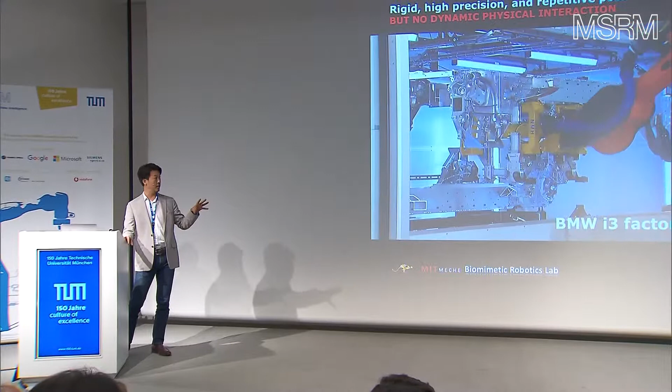This is a screen capture from the BMW i3 factory. It's a little more appropriate in Germany, not so much in Japan or US. But these are amazing robots - they're faster, more accurate, much more consistent than humans, and they don't get tired. They're super accurate, they can do all these things really well.

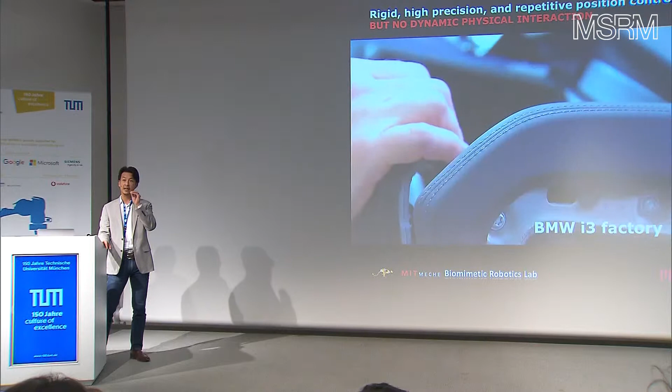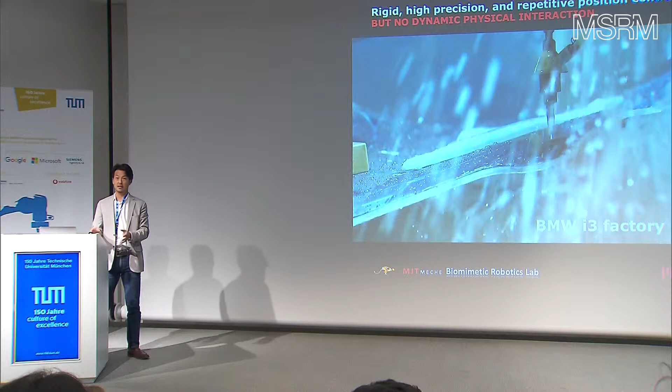But if you really look carefully, none of these robots are actually dynamically interacting with the environment. So when it comes to soft objects, even cabling, it all has to be done by humans - because none of these tasks that require dynamic physical interaction can be done by just coding a position. All these robots are just following a predetermined trajectory. So literal physical interaction, not just moving objects from one place to another, cannot be done by just writing a position.

Antonio already showed this video, but I'd like to show some clips from the DARPA Robotics Challenge, designed to tackle disaster response. There are amazing algorithms and amazing engineers working on it, but the hardware is not quite well suited for this kind of task, because many of these robots have components that came from manufacturing applications - pretty much the same technology.

But if you look at the animal world, things are quite different. The biggest difference is these are built to handle impacts. Probably none of you think about this every day - I think about it every time I walk. Every step is impact, every time I grab my cell phone from the table is impact, and we are dealing with it.

It's invisible to you because your hands are doing it automatically - you're not really aware of what your hand is doing. Think about during lunch, what your tongue is doing. You have to chop your food down, and if a big piece comes out, you push it back to the teeth. Your teeth don't have any intelligence, right? You're chomping down, and if pieces are small enough, you throw them to the back of the throat.

And if you find a small piece of paper, you bring it out with your two lips while you're talking to your friend about politics, and you have absolutely no idea what your tongue is doing. Same thing happens in your hands and everything.

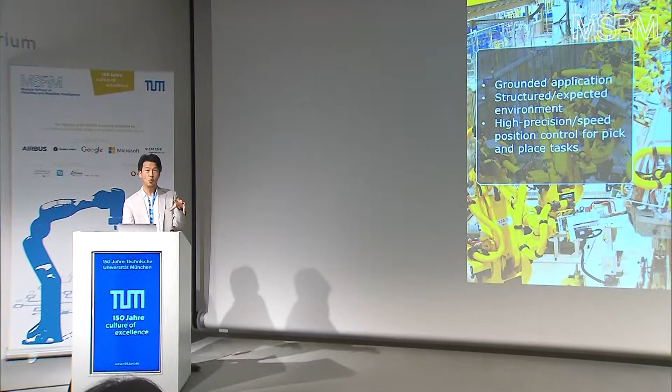So my point is we need to change our robot design paradigm from grounded applications, where everything is known and position accuracy guarantees success of the task, to mobile applications, where nothing is really like that. Your robots are not anchored to the ground - you have to control your balance rather than your position accuracy. Force control is way more important because nothing is certain.

You always have to deal with an uncertain environment. You have to deal with situations where unexpected collisions happen all the time.

So the design paradigm needs to really shift, and many other people, even in this room, have worked on this area. I just want to point out a few things.

Conventional machines are typically stiff, and with the stiff sensor, the series elastic actuator has been really popular, and there are many success examples.

In our group, we actually took the old idea and came up with a slightly different concept. We call it proprioceptive actuation. We basically minimize inertia and friction between the actuator and the end effector by reducing gear reduction and reducing all the inertias.

And then maximizing the torque density of the actuator, so we can actually get rid of a lot of system-level issues, while maximizing the force bandwidth. So I'd like to show a couple of examples.

The first one I'd like to show is the Cheetah 2, which we published in 2014, I believe. Many people say, wow, it looks like a dog running, but I want you to look at how the machine handles impact.

This is a non-trivial machine. It's about 30 to 32 kilogram robot running about 22 kilometers per hour. It's as fast as me.

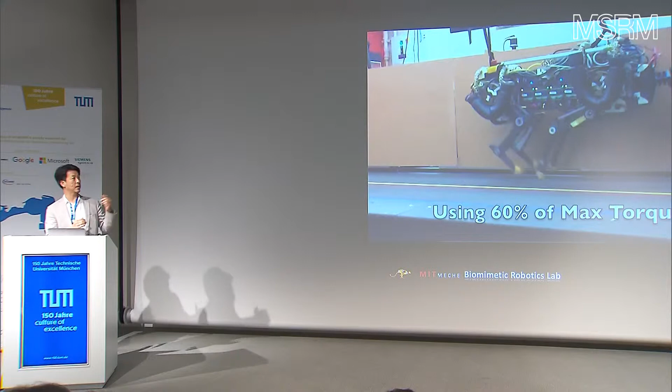Every impact at high speed generates about 50 to 80 kilogram force in each foot. I'll show you the data. The time on the ground is about 80 milliseconds.

It can turn, but it's pretty terrible actually at turning. I'm going to show you a better machine later.

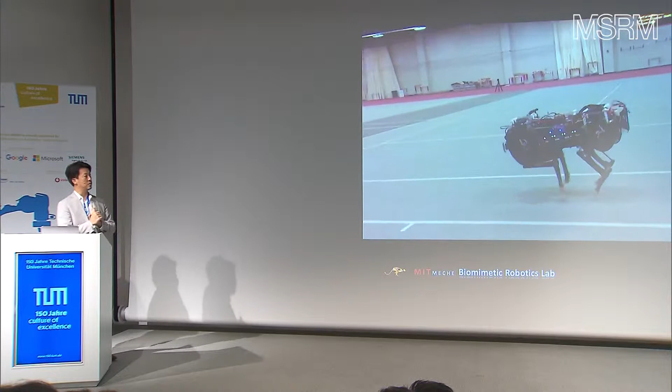This is the first time we integrated vision to react to an obstacle. The LiDAR system looks at the obstacle and measures distance and height, and then we run a real-time optimization.

At 10 hertz, we solve this problem ten times a second, and then react upon it, jump, and land. So the most important part in this video is actually landing.

We spend about 95% of the time on how to land. Jumping, recognizing the object, and solving it was a piece of cake. Landing, not falling, is actually the hardest thing.

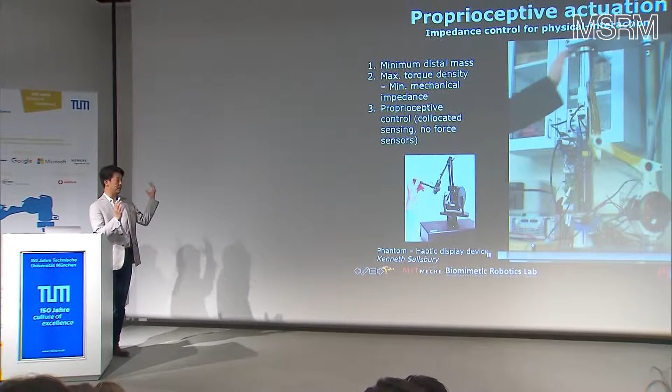This is a video from 2010. We first built the leg to see how much we could exploit the concept, so we can impose whatever impedance within the stability range.

We can make it into a pure damper. We can make it into a spring. And we can change it at the millisecond level.

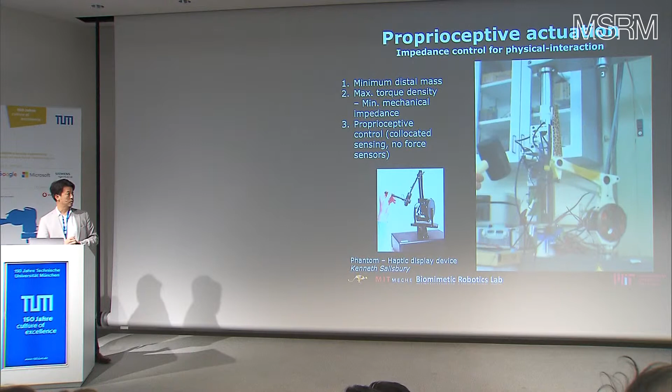It depends on the situation. This is an impedance control example, but most of the time our robots are actually under force control. So during the swing, leg swinging is all impedance control, position control with feedback linearization to make the position accuracy better.

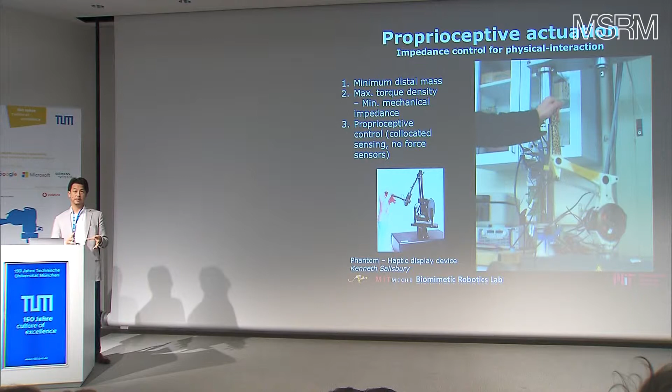But as soon as it hits the ground, we switch to the force control regime, and all the inertia is ignored as soon as it hits the ground, because the body inertia basically dominates.

This concept isn't necessarily new. Phantom has some examples, but the best example I think is from 1994. This was actually the bigger main motivation, the main idea source for our Cheetah robot.

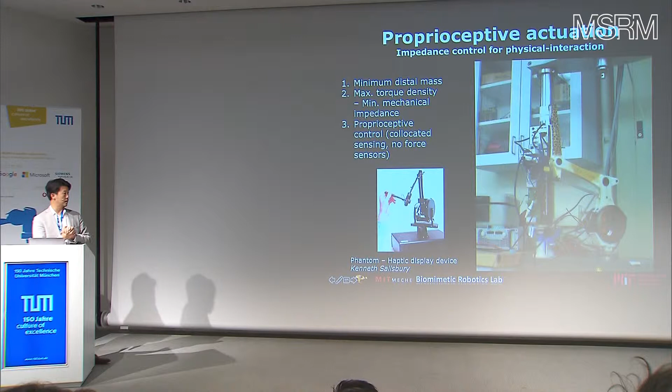The Phantom is, in my opinion, the best force display, haptic display device, and the concept is exactly the same. Ken Salisbury never actually published a paper about this.

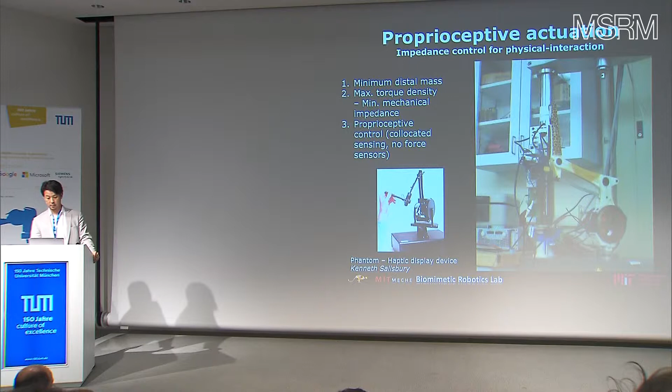So we made a bigger version, focused on force density, because haptic devices tend to be very weak and can't deliver high torque. We focused on motor design and other aspects so we could use it in a real system. We call it Phantom on steroids.

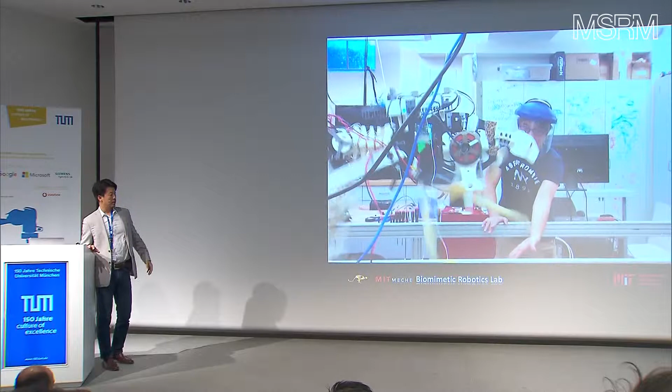There are many advantages, but one of the biggest is that you don't need to have a sensor in the foot. We basically have a piece of rubber, but our robot can still detect things without having a force sensor.

I'm going to show you many other examples later. Many people thought, oh, you're measuring current. It's actually not measuring current.

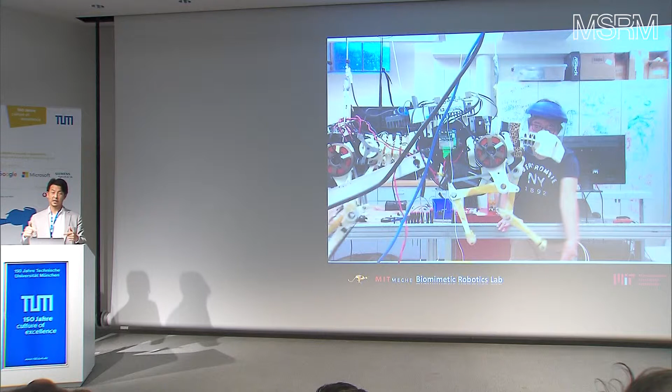We're actually commanding force. We're detecting our deflection, and the deflection dominates how much force we're recovering. There's some noise issue, but mainly we're actually controlling forces.

I don't want to go through all the math, but we realized the most important aspect of actuator design is actually inertia. So we look at the inertia distribution, and basically the best way to describe how backdrivable your system is is the inertia ratio.

So we say, don't call it backdrivability anymore. We have a better metric, which is IMF, impact mitigation factor, which basically compares your inertia matrix at the end effector with your worst case scenario.

That's a locked position, so it doesn't work with a non-floating base machine, but you can always make the machine float and then apply this, and calculate your IMF. That will be the best representation of your machine's capability of handling impact.

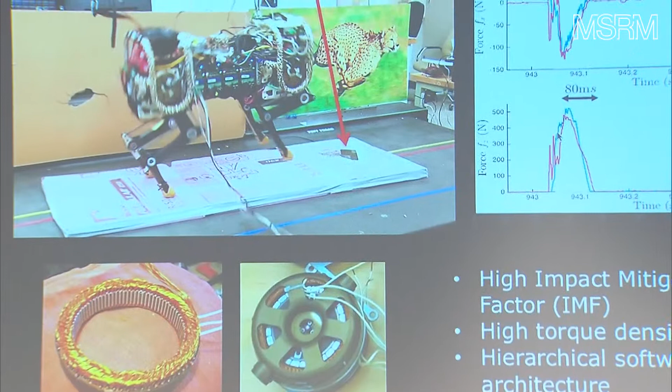There's no feedback, you're just comparing the commanded and measured, and there's pretty bad accuracies, like 15, 10%. But I want you to look at the time axis. This is about 80 milliseconds. 80 milliseconds is most manipulator people's accident, it's hitting like this. Your blinking eyes takes about 400 milliseconds.

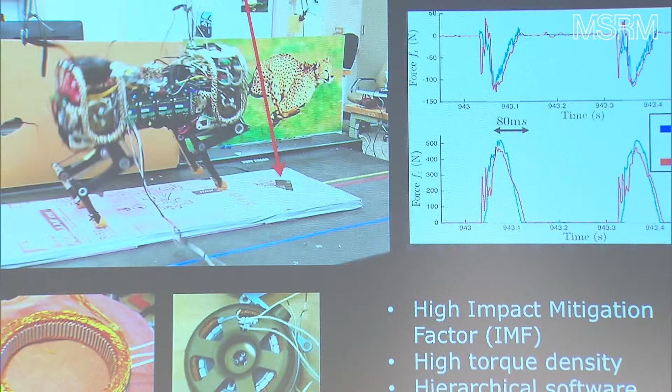About a fifth of the time, we should be able to control ground reaction forces up to 50 to 100 kilogram. That's the level of force bandwidth we need to have to make robots run and balance.

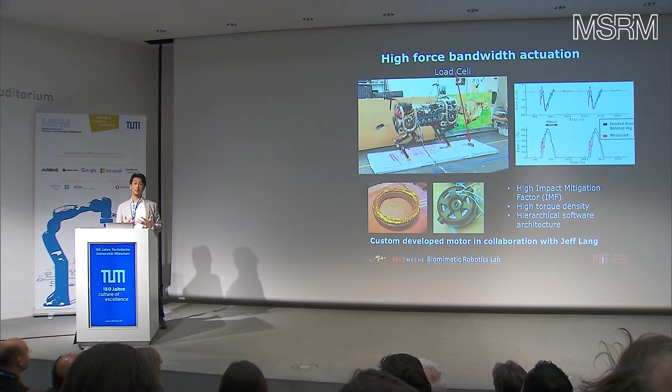And why do you need to be that fast? That's all the time you have. Real Cheetah is running at 60, 70 miles per hour. Each leg stays on the ground about 45 milliseconds. When you're running or jogging, each leg has about 150 milliseconds. When you're walking, you have 400 milliseconds, but that's still a very short period of time. If you cannot control that very short period of time, you will not be able to balance. That's basically the nature of locomotion.

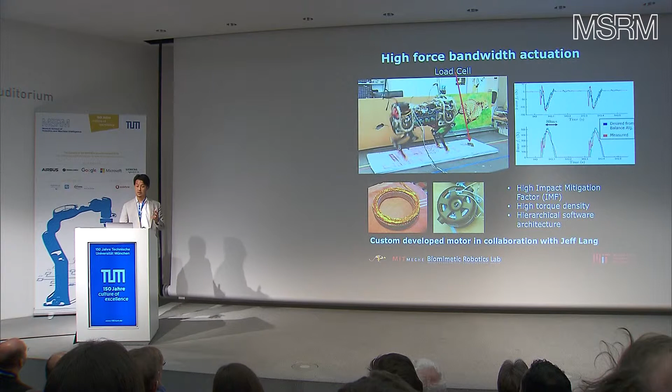And if you think about manipulation at human level speed, it's actually not that different. You have to think about force bandwidth as one of the major criteria.

I just want to point out, by the time we were building the Cheetah robot, it was very controversial - a lot of people thought it wasn't going to work. After we showed success, many people started taking our concept. Spot Mini from Boston Dynamics - not all the joints employ our concept, but the knee joint, the most important joint for handling impact, actually takes our concept and uses it. One Chinese company sort of copied the Boston Dynamics robot, but the actuation concept is exactly the same as ours. Cassie is another example. So many successful robots started employing our proprioceptive actuation as a successful use case.

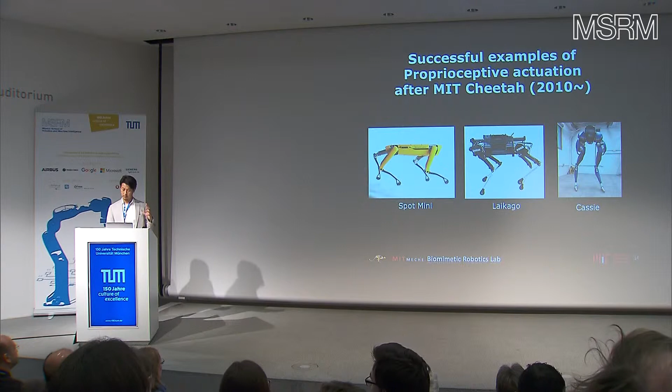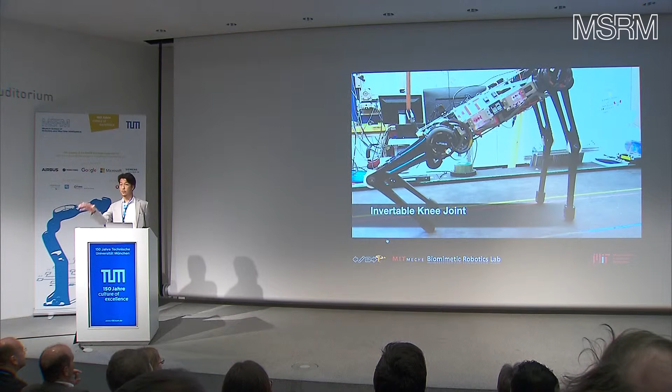I want to introduce a third version, the latest version. It's heavy, still 40 kilogram, and each joint can generate about 220 Newton meter, which is about as strong as a car engine, like a sedan. But you shouldn't be surprised - most of your knees can actually generate about 200 Newton meter, so you could attach an engine to your knee and your knee would win over the engine. Your hip can generate about 300 Newton meter.

This robot starts running on MPC, model predictive control, looking ahead about half a second into the future. We write a cost function around that state half a second in the future. So it's good for dynamic maneuvers because you need to really predict the future - the instantaneous controller is really not good for this dynamic gait.

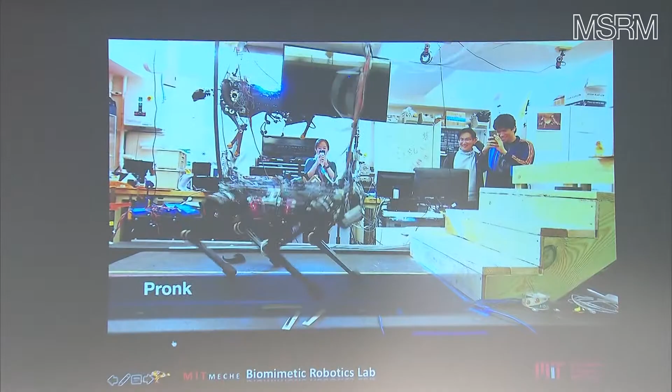And again, the machine is designed to handle impact. So those gaits are just part of the story - the machine should be able to handle those impacts all the time, because that's the nature of leg locomotion.

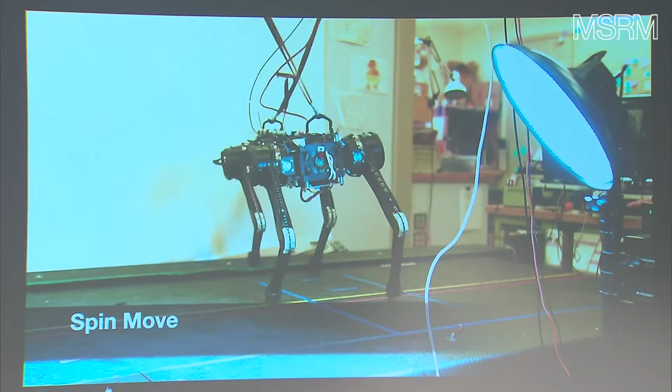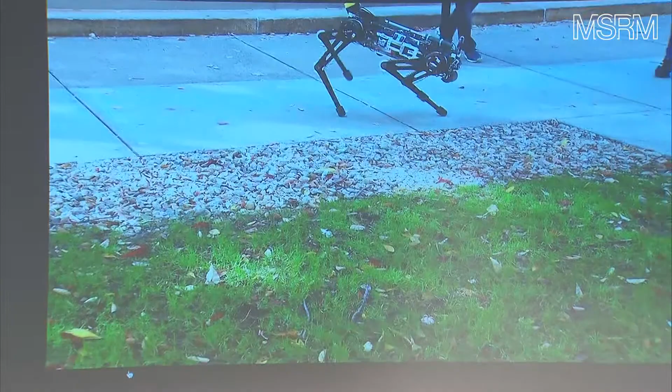The interesting thing about the leg robot is you can command the direction of motion and orientation independently. So you can command turning left 1 radian per second while going 45 degrees to the right. You can do that - each leg basically has a 3 degree of freedom force source, and ground reaction force control bandwidth is about 20 to 30 hertz, which is critical. You can command the same algorithm with 3 legs, assuming 1 leg is broken.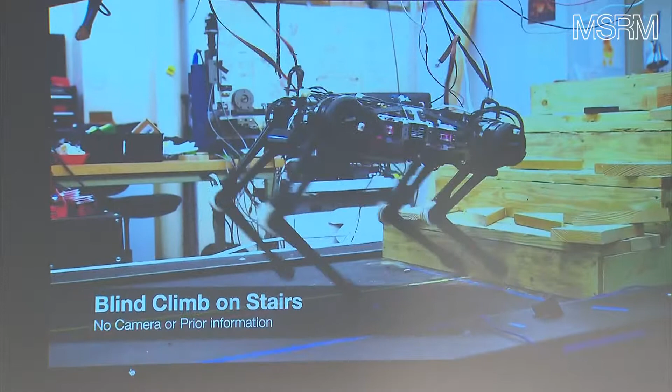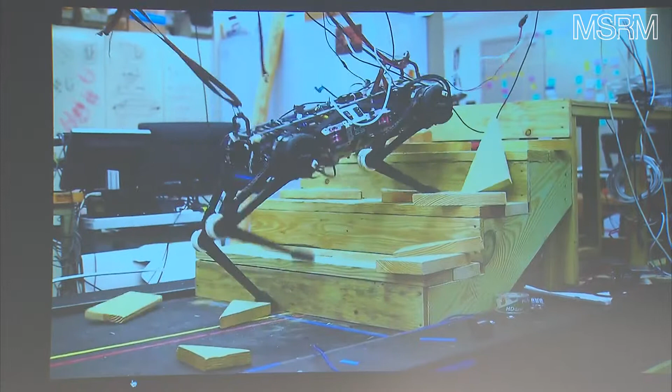And this part is interesting - you don't use any prior information of the stairs or a camera. These are all based on touch. As soon as our touch algorithm detects a contact, that becomes a ground reference, and we create our own desired position. These are all done automatically.

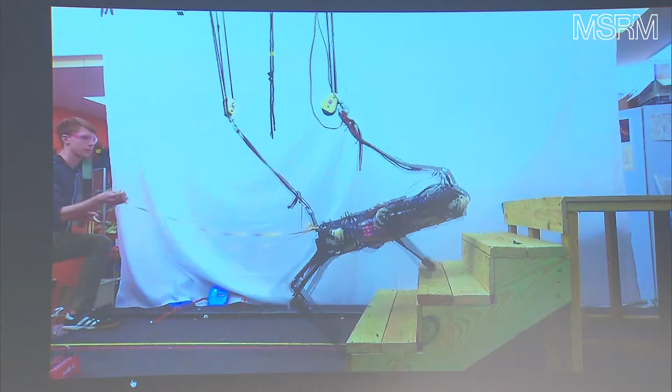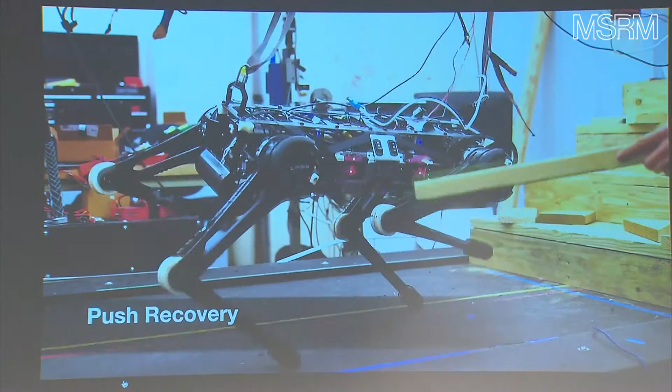Contact detection becomes a very critical part of our algorithm. If you don't know how to switch from the swing to the ground, you can't actually go over an obstacle very, very well.

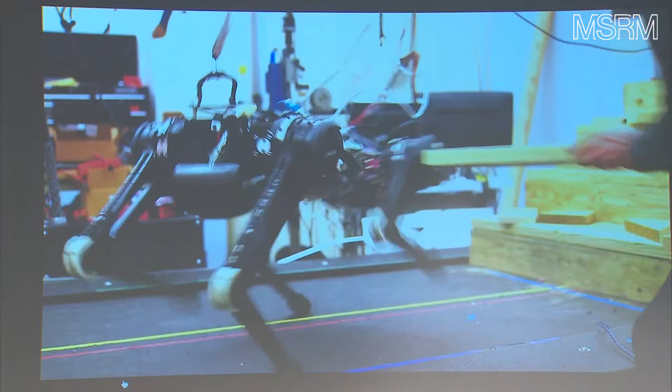One of the reasons why we're focusing on blind control is we don't want to rely on camera for every single detail on the ground. That's going to slow down and I think mitigate our robustness in navigation.

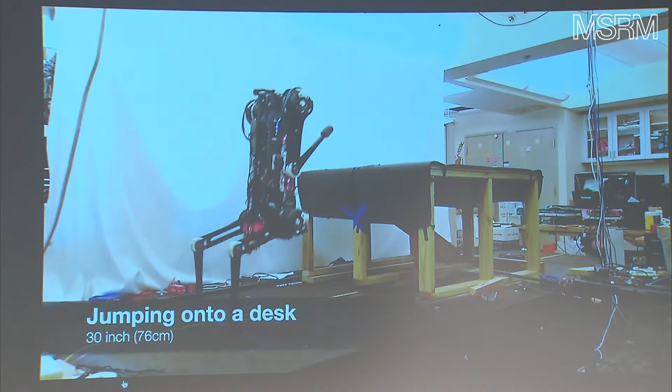You might find this looks kind of weird because it's not like an animal, and this robot doesn't have any spine. If you look at it more than an hour, you realize that's actually the best way to jump up.

Many people ask, how are you going to jump down? This is how you jump down. It looks even more strange, but if you really think about minimizing pitch rate and minimizing pitch at the target, that's actually how you're supposed to jump down.

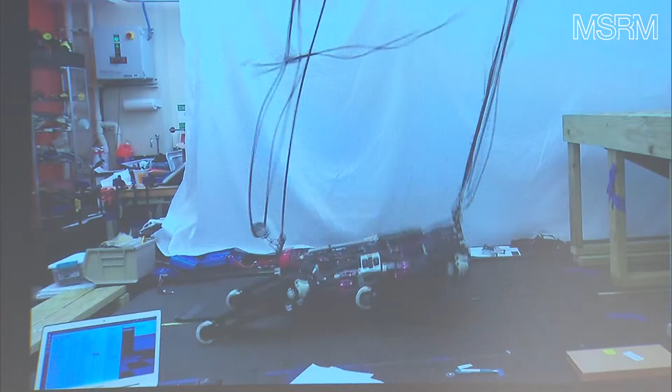Again, your brain is firing mirror neurons. That doesn't look like a dog or cat because our robot doesn't have any spine.

So we're actually building 10 mini Cheetahs. It's about 60% of the big Cheetah, and that allows us to have a ninth or eighth of the torque. That makes it inherently safe and a lot more capable.

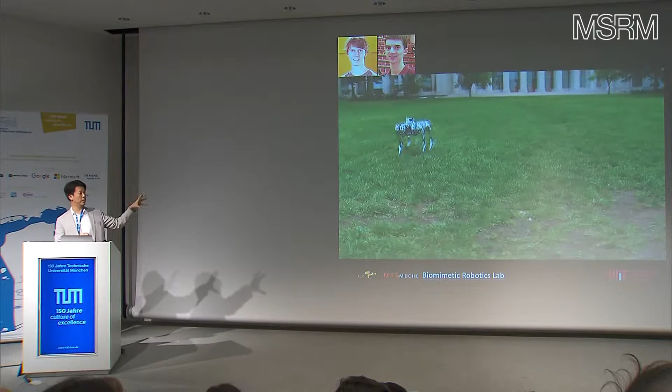Again, same proprioceptive actuation concept. I can't imagine any other actuation that would allow us to do this. And now we're not actually using custom motors. These are actually off-the-shelf commercial motors, so they're extremely cheap at this point.

The only challenge is at this scale, the robots are smaller, your contact becomes a lot more uncertain, and the contact time is shorter as well.

We do that all the time, like 10 times a day. It doesn't really matter. It has a very simple state machine, so you can recover whatever posture, and it doesn't break, as I said.

We're building about 10 of them, and 5 of them are going to be distributed to academic institutes. We haven't quite figured out the process yet, but we're going to collaborate using these machines. So anybody who wants to try a different kind of algorithm than us, if there's any common interest, this is going to be the ideal platform to test.

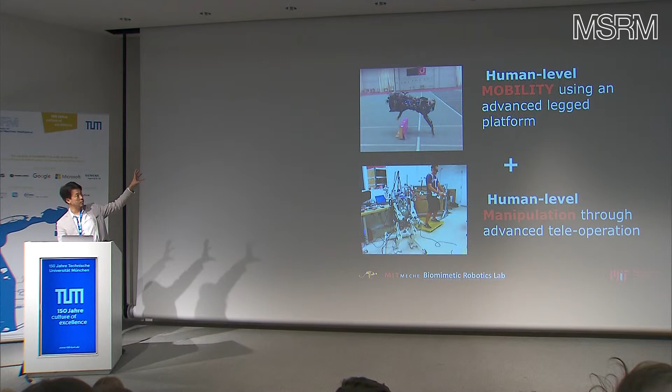So skip another backflip part. I want to spend a couple of minutes introducing the future of our lab. We're focusing on human-level mobility with human-level manipulation.

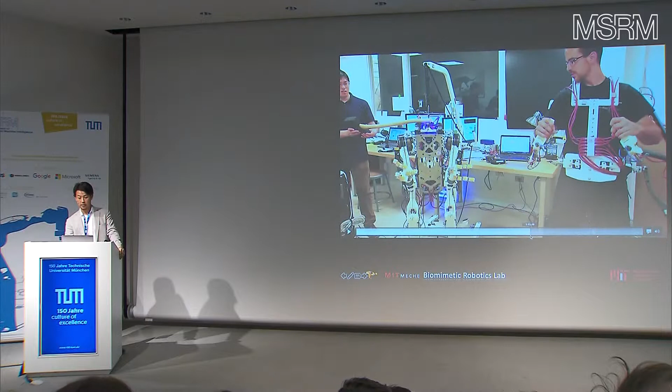So we've been working on full body manipulation using the human body, but this is more of what we call balance feedback. We're trying to utilize human intuition in balancing the robot. But we're not necessarily trying to balance the robot, we're trying to actually be able to do power manipulation, like tasks that take a lot of force.

Because when it comes to a mobile robot, it's very difficult to apply high forces on the environment because you have to balance yourself. So in order to throw an axe or open a heavier door, you need to be able to utilize your body.

So my student is actually working on a synchronization algorithm. There's a motion capture system with a force sensor on the ground, and his algorithm automatically, independent from the scale of the robot, can synchronize the simple dynamics between the robot and the human. The human is wearing haptic feedback, which applies forces to match the dynamics.

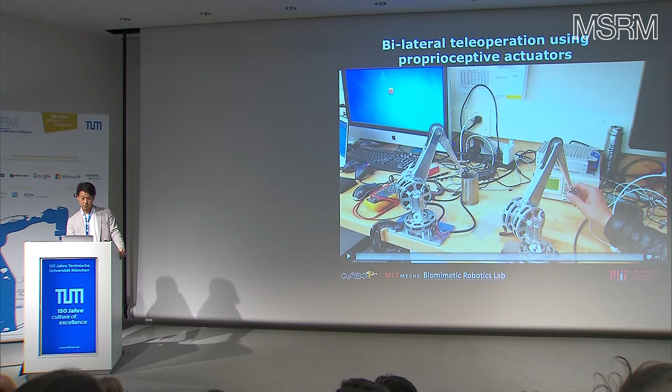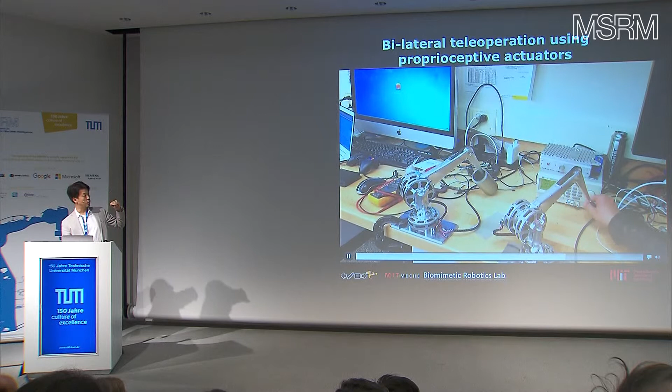And when it comes to actual detailed manipulation, we are also working on a 6-degree-of-freedom version of this. It's the same proprioceptive actuator, but set up in a bilateral teleoperation setup. So my hand can actually sense all the forces of the other robot, with extremely high bandwidth, and impact mitigation without having instability issues, unless there's a delay in the communication.

So I just want you to think about the future. This is one of the applications you can think of. But in this simple task, like moving a person from the bed to a chair, how many delicate contacts have to happen?

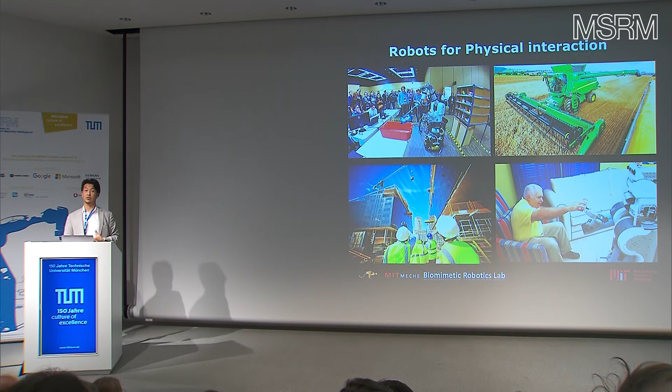I'm not sure humanoid is the right form to go, but even in this task, humans have to be handled very gently—a very, very tricky situation. You can think of many other areas. Physical interaction is going to be a very important part of our robotics applications in the future.